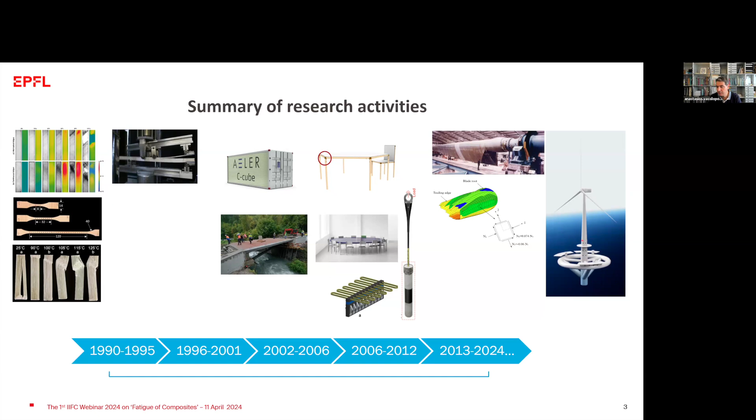This is experience gathered over the last 30 years, and actually this experience led me to start discussing and investing time on new concepts where I think we can use composites for novel or innovative structures, like this offshore platform shown in this figure.

The experience that I have is on composites, and it's not dedicated only to one application. It's not dedicated to aerospace. It's not dedicated to bridge engineering. It's a global overview that I gained on composites in different engineering applications.

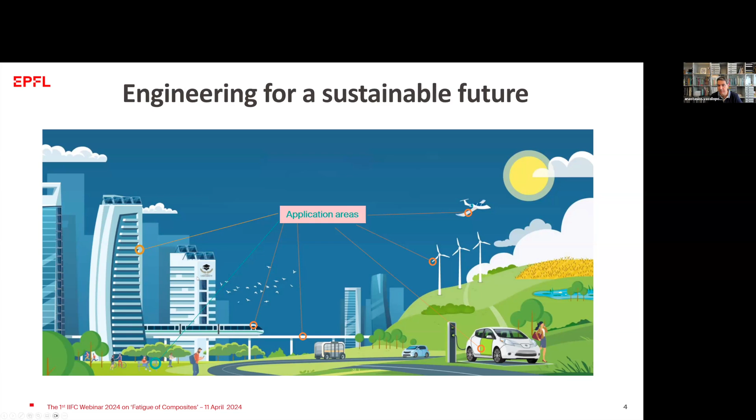Especially when we talk about composites, you all know better than me probably that we use composites because we claim they are more sustainable in engineering. Today we have a lot of proof for this claim, arguments to support it. So we see composites in literally any kind of engineering application today.

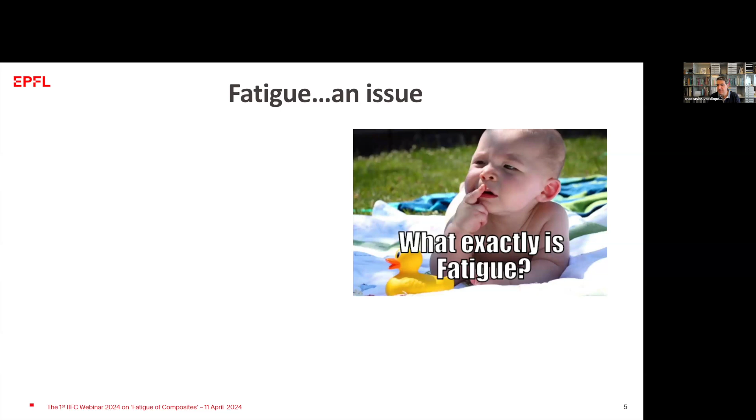I said I'm working for 30 years, and for me 30 years is an issue—it causes fatigue. I was thinking since I was very young, what exactly is fatigue? And after these 30 years, I realized that we have very little idea about fatigue.

And how it affects a lot of structures in our environment around us. So what we'll try to discuss today is fatigue—introduce fatigue and explain what fatigue is for those who probably don't have such a deep understanding about this.

We'll try to touch on the importance of fatigue for composites, and at the end of the day we'll summarize what we know today about composites fatigue. I hope that afterward we might have an idea about what fatigue is.

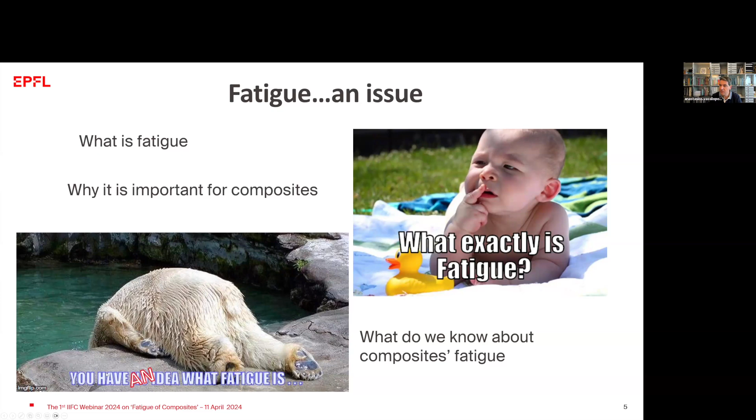If we go back to history, we can see that fatigue is something that has been bothering engineers for probably 200 years, with the first investigations starting in Germany about 200 years ago.

It was this engineer called Albert who realized that there were failures in conveyor chains, although they were not loaded at the highest loads they were designed for. They realized this was something different than static loading, than the loading that causes static failures, and they tried to find out what was causing this kind of unexpected failure.

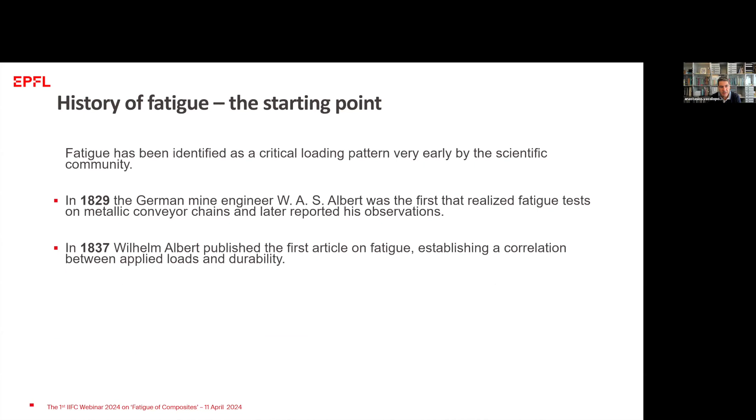Later on, he was the first to conduct tests and publish something related to fatigue, although he didn't call it fatigue. It was the French engineer Jean-Victor Poncelet who wrote the first document in 1841 where fatigue was mentioned as fatigue in something written. So the first time we see fatigue written in a text was in 1841.

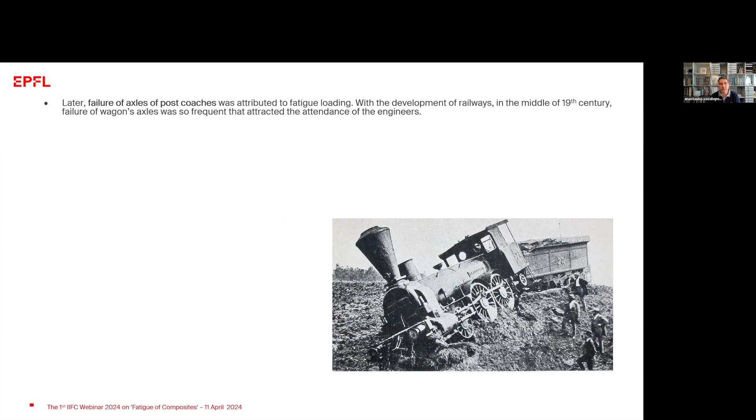Later on, we saw a lot of failures in axles of post coaches and trains, which led to a lot of investigations. What's surprising is that the same types of failures, like train derailments due to failing axles from fatigue, are still happening today. We have some reports.

This one I'm showing here is from Australia in 2017, and we see a typical fatigue crack on the axle of the train. Due to these failures, there were a lot of investigations documenting that most structural failures are due to fatigue or fatigue-related phenomena. Actually, more than 80 to 85% of failures in any structure are today acknowledged as fatigue-related.

So these investigations, or if you like, these observations of failures, led engineers to do more.

The first big program on fatigue of metallic materials was the one realized by August Wöhler. Probably you all know the Wöhler curves that we are still using today.

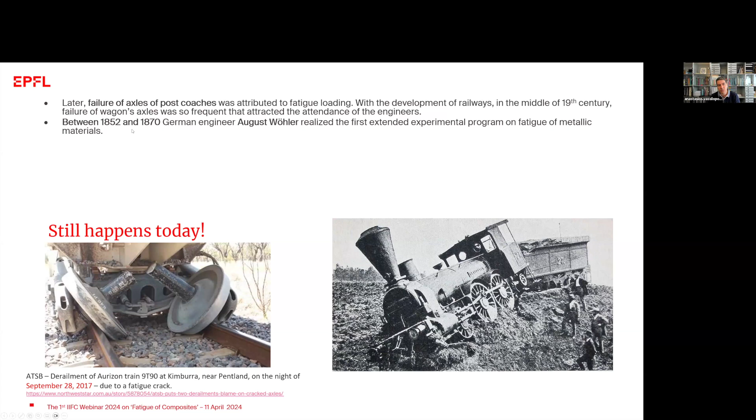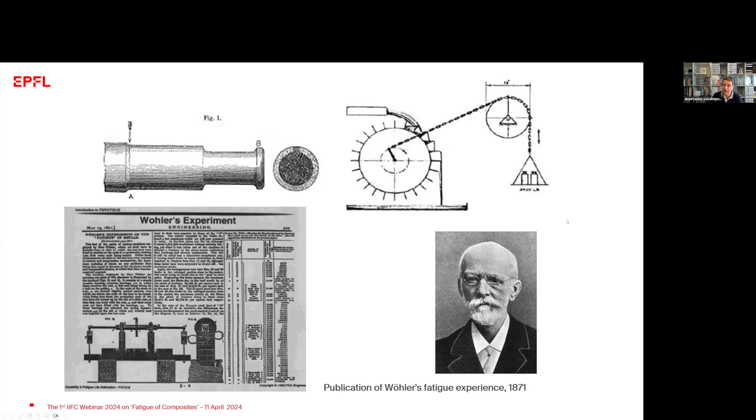What did he do? He tested railway axles for different loads. I have the paper of Wöhler, the publication. There was a continuous tension compression loading because it was a rotating machine applying different types of loads to the axles, and he reported the time to failure.

Imagine this is my graph. I'm doing a test where the maximum stress applied is 70 megapascal. I count the number of cycles to failure, which in this case might be 7,000 cycles. I put this point here, and this is the first point that I have. If I repeat the test at the same stress level, I get repetition of points that show the scatter of the fatigue data.

I can do it at a lower stress level, and lower, and so on. This is how we create the cloud of data that produces what we call today the SN curve, what was called before, and is still called in metallic materials, the Wöhler curve.

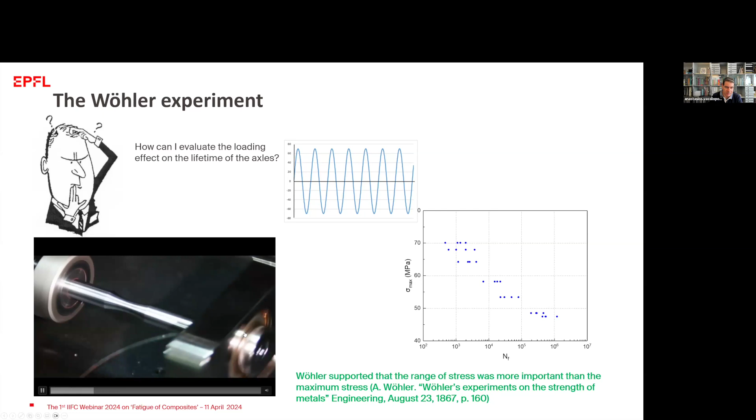So here I collected from the net an experiment, a small video showing the experimental procedure, similar to what Wöhler did. We have a rotating specimen here, a load that causes the stress, and then after some rotations, we see the failure of the specimen in the middle, which is attributed to fatigue.

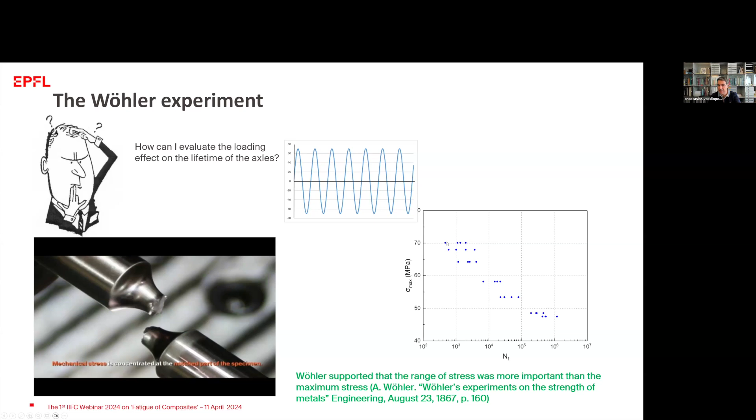So we described what happens here: we put the specimen under load, test it, and record the number of cycles to failure. This is the procedure I described before, and then we have the question: what happens in between?

Before, what Wöhler did was only putting the data on the SN diagram, as we call it here. Then another engineer, Basquin, introduced a line, claiming that a logarithmic relationship - a linear relationship between the logarithm of sigma and the logarithm of number of cycles - is appropriate to fit the experimental data well.

This first SN curve, if you like, was introduced in 1910, and guess what, it is still used today. This is the most common SN curve equation we use today, although others exist, because as we will see later, there are different ranges of lifetimes showing different failure modes or failure behavior of the material. Today we know the SN curve is a bit more complicated than this.

So then we had the effect of the mean stress. What we described up to this point, what Wöhler did, was a rotating axle with a load at the end, meaning tension and compression of the same amplitude, so the mean stress here is 0 in this testing.

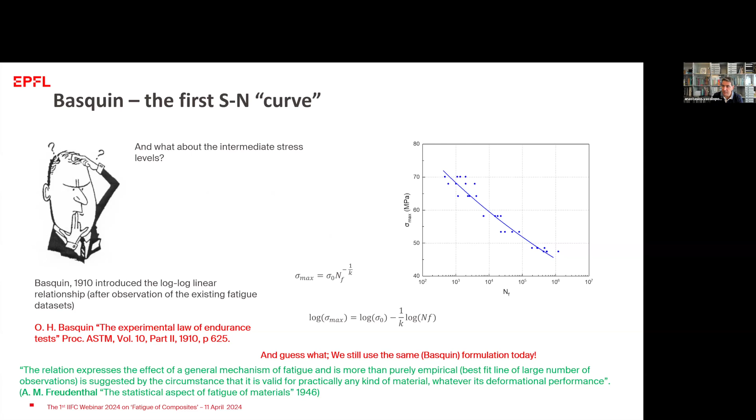If the mean stress is not 0, for example if we test only at positive stresses or only at negative stresses, then there is a mean stress effect. We've seen today that there is an effect, especially for composites, a significant effect of the mean stress. And good for us, there was a good man...

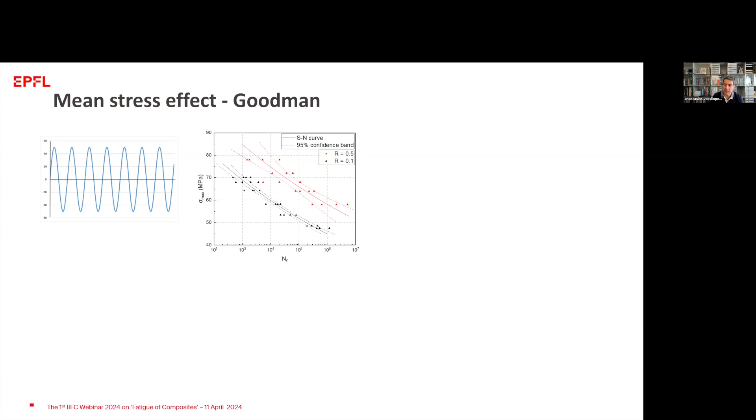His name was Goodman, who developed diagrams called the Goodman diagrams, which give equations that can more or less give a relation between the amplitude of the loading and the mean stress of the loading. In this sense, we can get some relation between these magnitudes, these stress components, and quantify somehow the mean stress effect on materials.

We'll see later how this is applied now to composites. I had it also before - all these engineers, I mean Goodman was a civil engineer, but was working on this investigation of the mean stress effect, and he was also modifying other types of investigations by others.

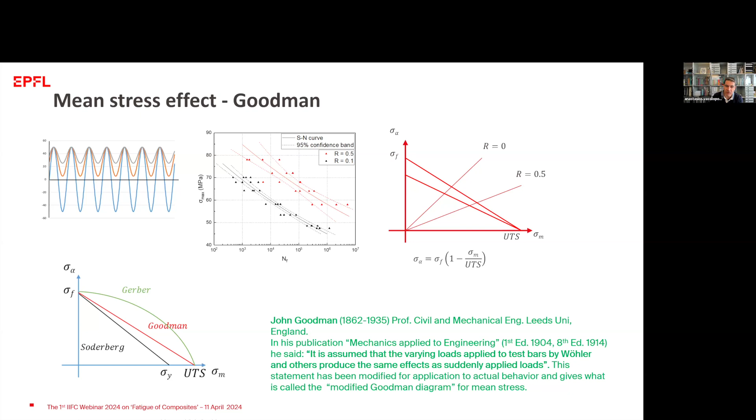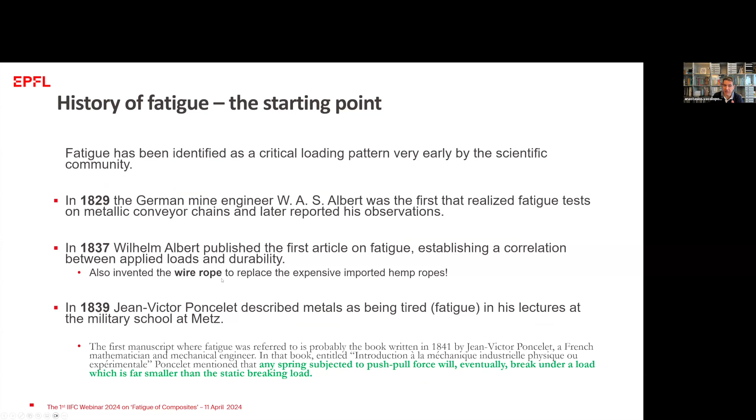Before, we've seen that, for example, here in this slide, Albert was an engineer working in the mines, but he also invented the wire rope, for example. You see that at this time, engineers were not focused as we are today on one specific application, but were engineers in a broader sense.

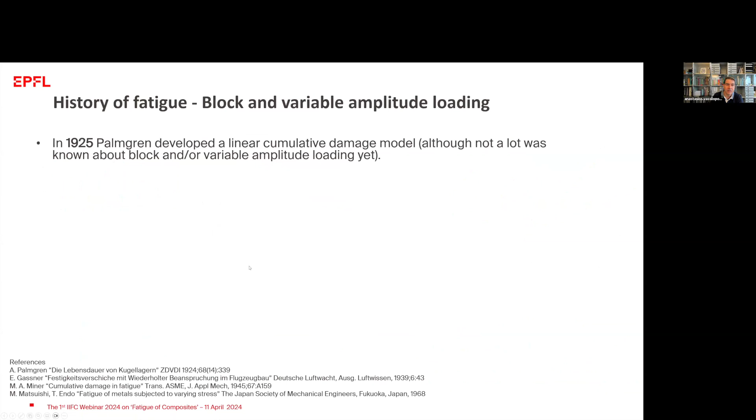We've seen that this continuous loading we already discussed is not close to reality. In real applications, we have loads of variable amplitude, and we managed to do realistic tests after the 1950s, where we had the first closed loop electrohydraulic testing systems that could follow a variable amplitude loading. It was during this period, more or less between 1925 and 1945, that Palmgren and Miner introduced the cumulative fatigue damage rule we still use today, although we know it's not very successful in predicting lifetime for composites.

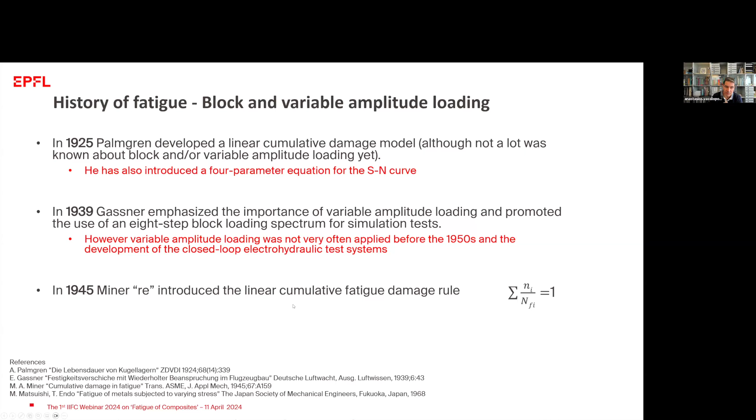What I was saying until now was based on phenomenological investigation. We do a test, measure the number of cycles to failure, and this is observation, it's phenomenological. In parallel, we had fracture mechanics investigations. We had Griffith initially, and then Irwin, who introduced the K intensity factors and fracture mechanics. One is the early father, the other is the father of fracture mechanics. I don't know who is the grandfather, but these persons put the basis for fracture mechanics theories we are still using today.

When we talk about fatigue, we talk about Schijve, if I pronounce it well, a Dutch professor, and Paris, who both worked on what we call today the crack growth, fatigue crack growth curve—a curve showing the relationship between the speed of the crack in fracture and the load we apply. The load can be given using K or using G; we use G in composites, the strain energy release rate. But there is always a component showing the load applied, and on the other axis, the speed of crack, dA over dN. So this is a typical Paris law equation.

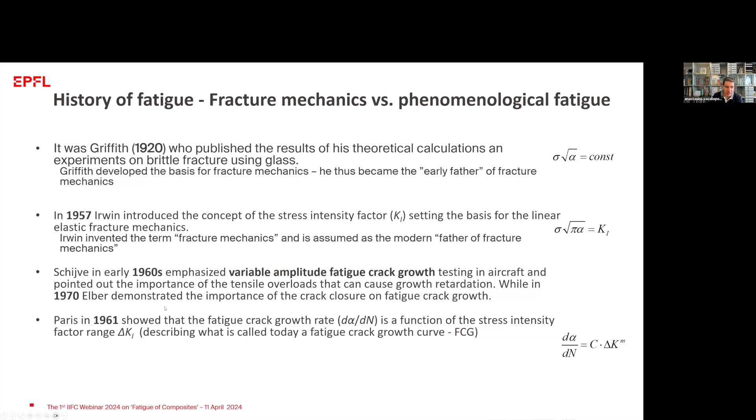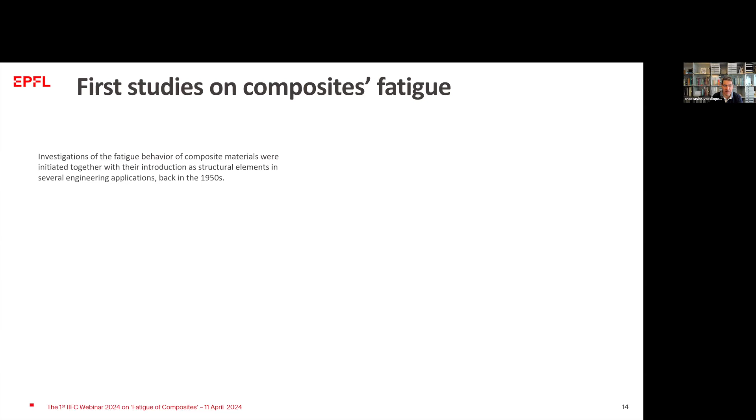Until now, we didn't say anything about composites, as all these investigations were linked to fatigue of metals, going back 200 years. When we talk about composites fatigue, we have to search back to the 1950s, with the introduction of composites in the engineering field. We've seen papers from 1948, 'Mechanical Properties of Five Laminated Plastics' by Findley and Worley, and another one from 1942. These are the first papers discussing properties of plastics, as composites were called at that time.

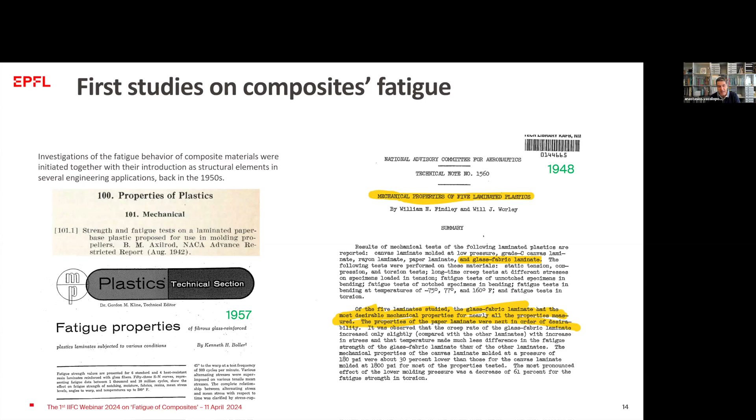Most of these papers do comparative studies. In this paper, 'Five Laminated Plastics,' if you go deeper, they tested five different types of resins with the same fibers to investigate their performance and find out which one is better. So it's mainly a comparison. The same was done by Hulbert in 1955.

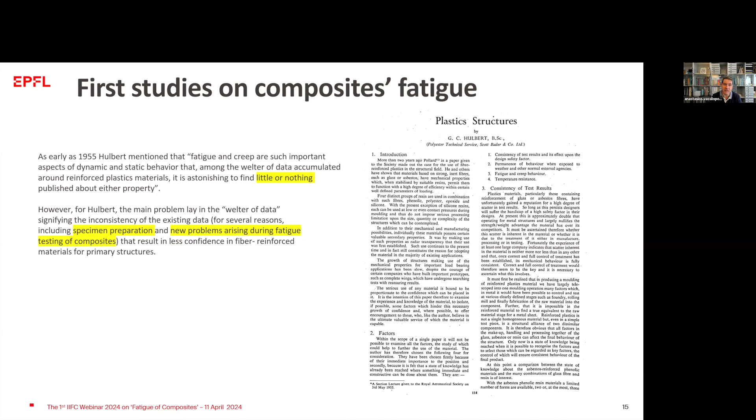Hulbert realized we have almost nothing published about creep and fatigue. Creep is introduced so early because, as we discussed before, regarding the mean stress effect, composite materials have at least viscoelastic behavior at certain temperature ranges, depending on the resins used. So we have materials that are viscoelastic, meaning that with non-zero mean stresses, we also have a component of creep in the fatigue behavior. This has been identified as a factor affecting fatigue life of composites, not metals, since 1955.

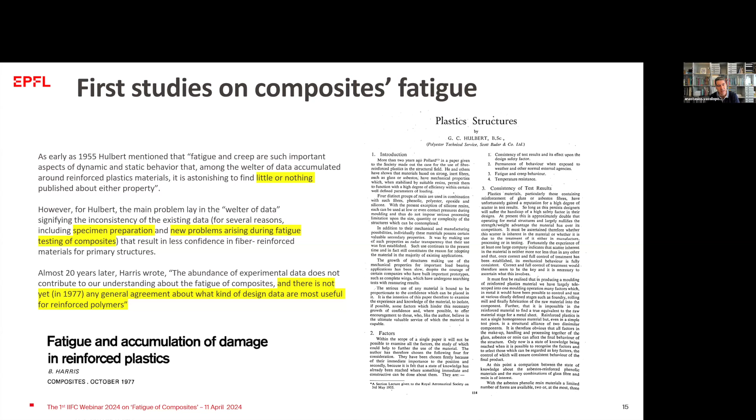For them, the problem was that we have only a few data points and inconsistency in the data. Going 20 years later, probably 45 to 50 years before today, Brian Harris, in his 1977 paper, said there is no general agreement about what kind of data we need to design structures with fatigue considerations. Coming to today, we still have this question. We don't know what kind of data we need. We don't have commonly accepted theories for designing composite structures for fatigue, and there is no commonly accepted protocol or standard for data collection and curation. We'll discuss this later as well.

Continuing this review of materials, we've seen that in the past, composite materials were considered fatigue insensitive.

And this characteristic of composites as fatigue insensitive was given when people started testing carbon fibers. Carbon fibers in the 0 direction show zero or very minimal stiffness drop during loading, and they saw no damage until close to failure. This was also introduced once in the 1980s as the sudden death phenomenon.

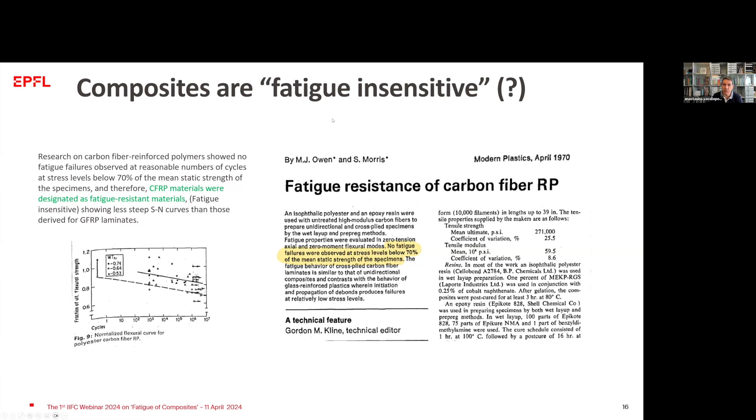It was the phenomenon where, while testing unidirectional composites along the fibers, no damage was identified, and then the material failed suddenly at a certain number of cycles, or at a certain point of stiffness degradation, without any announcement before. That's why it was called the sudden death phenomenon, and that's why composite materials were called fatigue insensitive. We'll see that this does not hold true anymore.

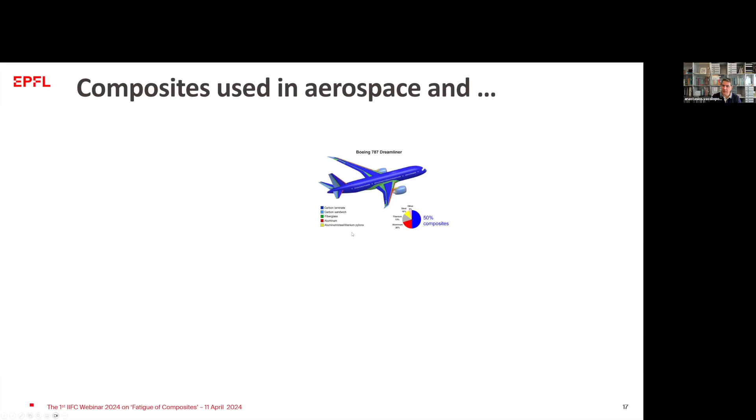So you probably all know this famous figure about the Boeing 787, which has more than 50% composites in the body. The same happens for Airbus, and we all know that composites are used in aerospace for a lot of reasons. Probably we don't have in mind the history of composites and the way they have been used since a long time ago, since the 1940s and 50s, in a lot of different applications.

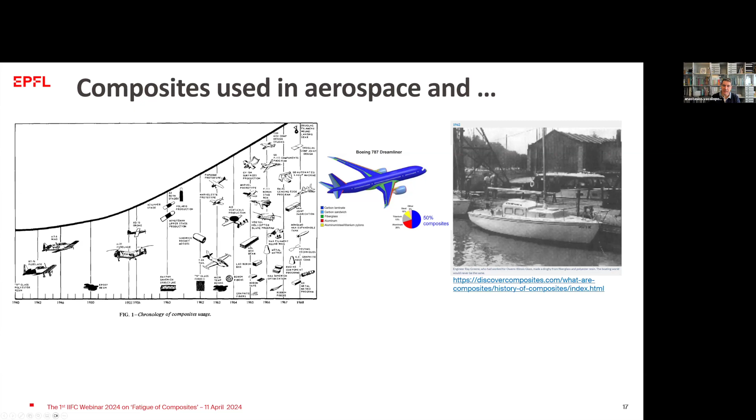The common characteristic of all these applications is that they all face intensive fatigue loads during their lifetime. And this is one of the reasons that makes fatigue for composites very significant. Another reason is the lightweight characteristic of composites.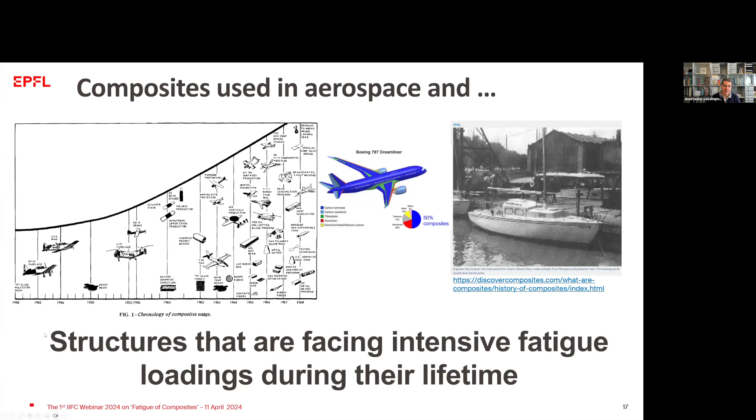If I bring a very simple example that might be self-evident for everyone: imagine a concrete bridge that is so heavy that the traffic load is minimal and does not affect the behavior of the bridge. If we talk about a similar composite bridge that might be 4 or 5 times lighter than a concrete bridge, then the live loads become significant. And the live loads are always fatigue loads for this application. So we know that fatigue affects the behavior of composite materials a lot in different applications.

And we now have a lot of structures like wind turbine blades that are supposed to live for 30 years more or less, and they face more than 100 million cycles during their lifetime. We have helicopter blades approaching 100 million cycles. We have bridges and ships which, depending on the design and dimensions, might see more than 10 million cycles. So we have a lot of composite structures facing a lot of fatigue loads during their lifetime. And these structures are massive, huge.

You know about the longest blade. Today, I think it's 120 meters. This was the longest blade a couple of years ago, 107 meters, made by LM for the offshore 12 megawatt machine that they were preparing at that time.

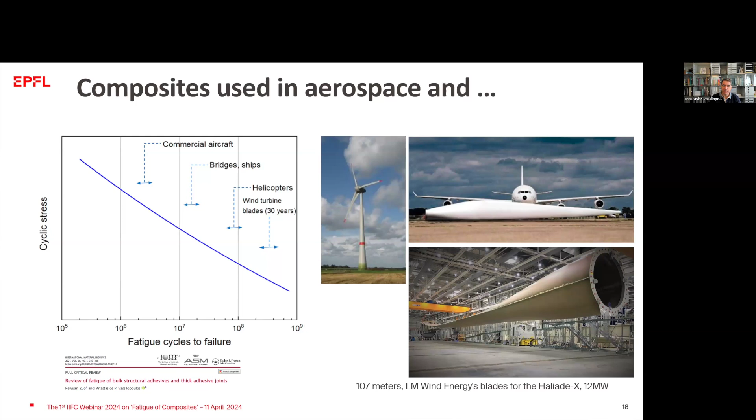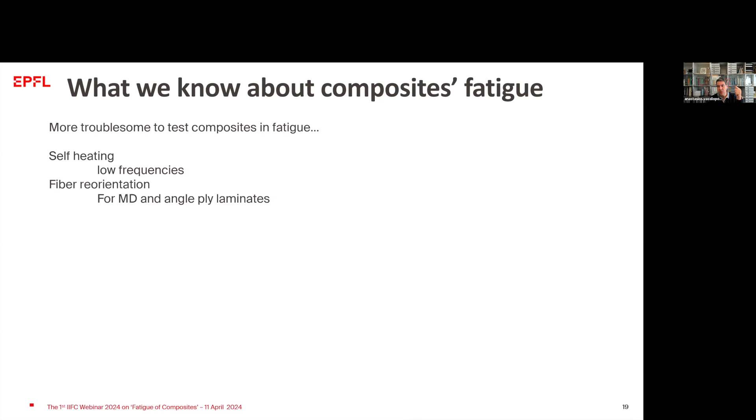So what do we know about composite fatigue? We know that it is more troublesome than fatigue for metals. When we test, we have heating of the material, so we need to test at low frequencies, which means we need to spend more time testing composites. We have problems when we test multi-directional laminates or angle ply laminates. We have reorientation of the fibers due to the loading, and this actually changes the material. So we are testing a material that is changing during loading, and we have to consider this as well.

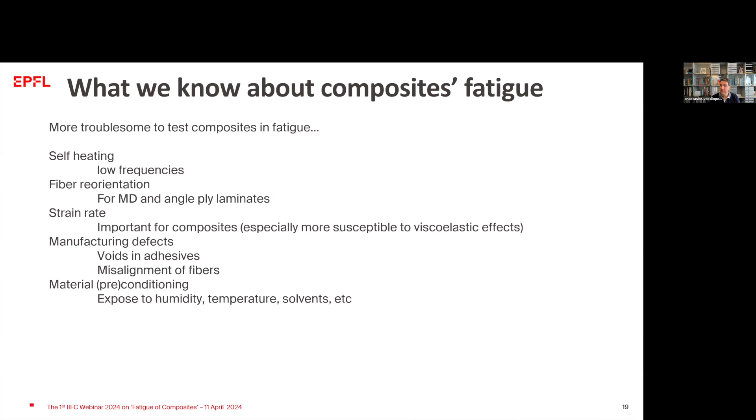We have an important effect of strain rate on material behavior, and it is more significant when we have viscoelastic components, such as thermoplastic composites, or epoxy composites where the matrix is quite ductile. We have problems with voids in adhesives, misalignment of fibers during manufacturing, or manufacturing defects that can affect the performance of the material a lot. We have material preconditioning problems because the material is very sensitive to temperature, solvents and humidity. So the material and the testing environment should be controlled to avoid all these effects. We have problems with specimen geometry and a lot of tab failures in composite or adhesive specimens.

And we have standards that fail to consider these effects. We follow the same standard, we use standard specimen geometries, and we get different results in some cases. So I'll come back to each one of these considerations of composites.

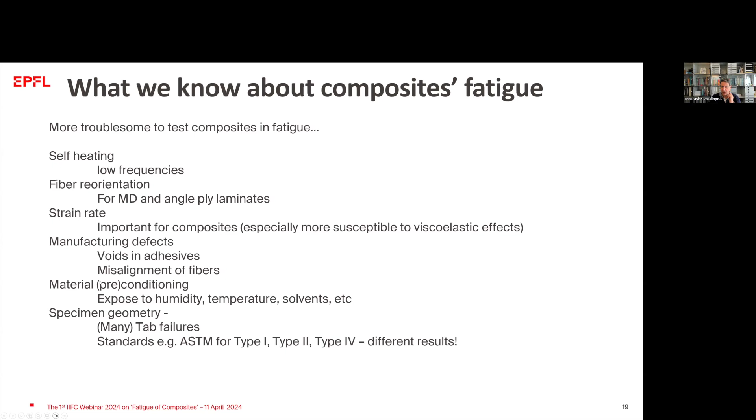I will continue discussing this knowledge that we have with composites, what we know. If you look back, although today we are still investigating these effects, we almost know everything since the 1970s.

There are publications from that time, this one from Salkind for example, 1973, discussing the damage modes or damage progression in composites compared to the damage progression in metals, which you see is much simpler. You have one crack that propagates, and at the end, when we reach a critical damage, we have fracture.

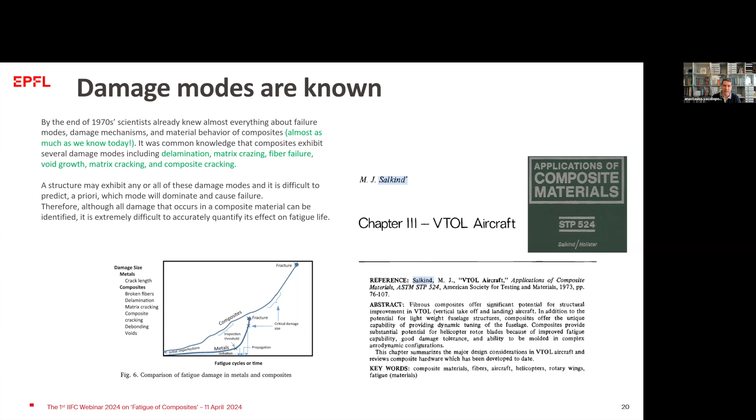While for composites, we have a lot of different failure modes that do not appear individually, but they are interacting, and this makes the behavior of a composite material much more complicated than the behavior of metallic components. So this investigation about failure modes started early.

In the early 1900s, we had the first use of optical microscopes to investigate fracture mechanics characteristics. In the 1950s, we had the scanning electron microscope, and today of course we use DIC, X-ray tomography, thermographic cameras to investigate all these effects in metals and, of course, in composites.

And we can go much deeper. For example, with the scanning electron microscope, what we see in this left figure is failure of fibers. When we go macroscopically with DIC, we can investigate and exactly locate the failure before it happens by checking online.

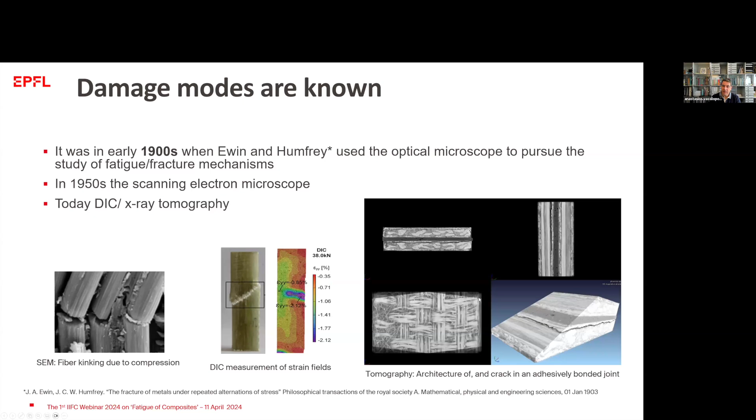I mean in situ, during the test, investigating and measuring the strain at different locations of the specimen. Or we can work with tomography to investigate materials and their damage modes in situ in some cases, but also ex situ after failure, to accurately investigate the damage location and the damage mode.

Continuing with what we know about composites, we know today that they are fatigue sensitive. Composites do fail in fatigue, and usually they do not show any fatigue threshold.

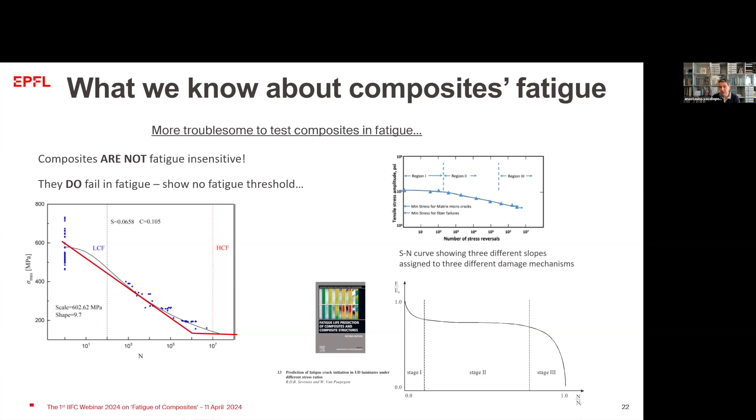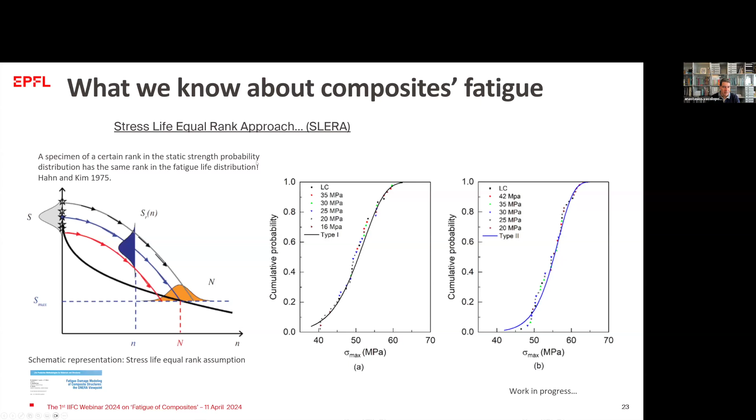Although this cannot be validated, because if you test a specimen in quasi-static loading and you break it, you cannot break it also in fatigue. It is something that we've seen with statistical analysis of failures of materials at different loading types.

We know also, as we discussed about frequencies, that there is a significant effect. When we do tests on composites, we try to keep the frequency low, lower than 10 Hertz for sure, sometimes as low as 1 Hertz, to avoid self-heating.

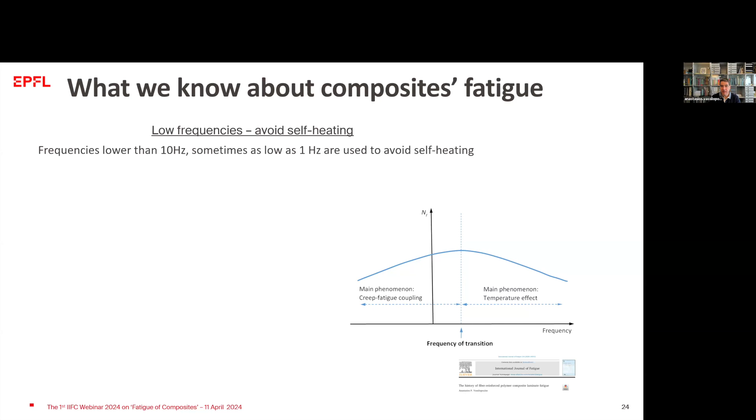This is because of the internal friction that comes when you have damage and cracks, and the material starts creating temperature, heat, because of the friction internally in the structure.

So what we know today is that there is an effect of this frequency on the material behavior. When we exceed a critical frequency, if you like to call it that, we have temperature increases and the life decreases because we soften the material actually.

When we go to low frequencies, and if we go to very low frequencies, then we have creep fatigue interaction, because testing at very low frequency means we keep the material at a certain load for a certain time, which introduces, in addition to the fatigue loading, creep effects as well. So actually the optimum is to find for each material, and this is not self-evident, but we have to do preliminary testing to find out which frequency is most appropriate for testing the specific material under investigation.

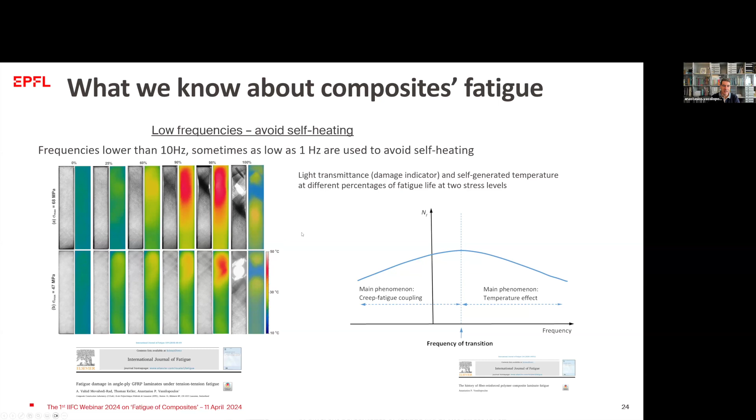We know also about these viscoelastic effects that we discussed before, the effect of creep, or the opposite of creep, relaxation of the material. As we said, composites are viscoelastic, and as we proved a couple of years ago with another investigation, we saw that if we stop the testing...

What we've seen is that the life of the material has been extended by a factor of more or less 2, which means there is a significant effect of this relaxation. The material relaxes when we stop the testing and recovers, and then we can start again at the same loading level and extend the lifetime.

What we've seen here, which is quite interesting, is that when we stop the test only at 2 hours and introduced a very short creep component, we've seen an increase of the lifetime, which means that this short stop actually helped the material recover instead of making the behavior worse.

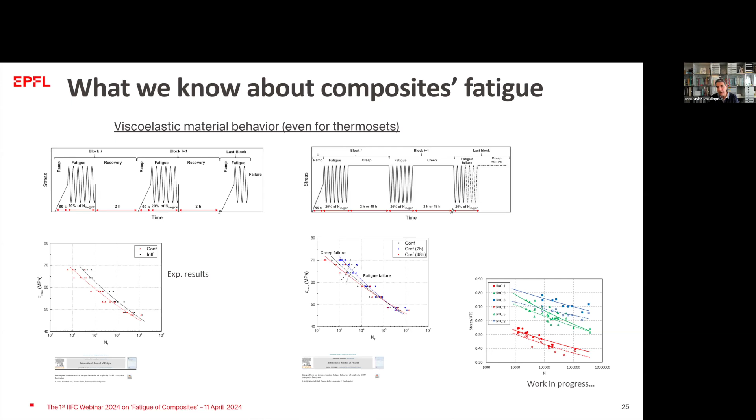And this is work in progress. I will not go into details, but we've seen significant effects of this viscoelastic behavior. And here we are analyzing the behavior of the material if we consider the true or the nominal strains that

we are measuring on the material during the testing by DIC. So we know also that Goodman, that we discussed before, is not anymore the Goodman. He's not good anymore, because the Goodman diagram that was suggesting a straight line between the known SN curves, actually the SN curve for R minus 1, R equal to 1, does not exist anymore, does not apply for composites.

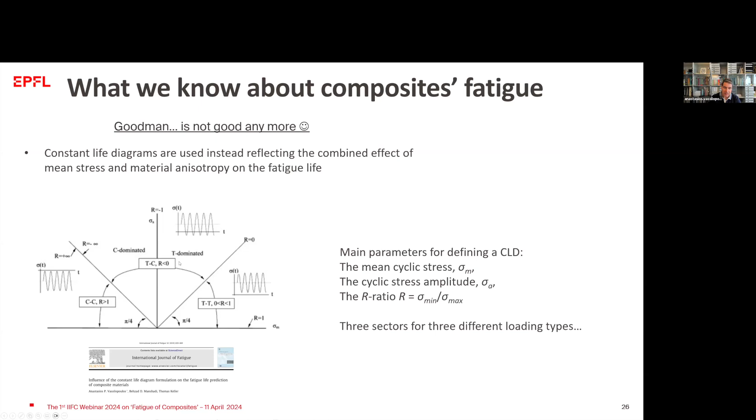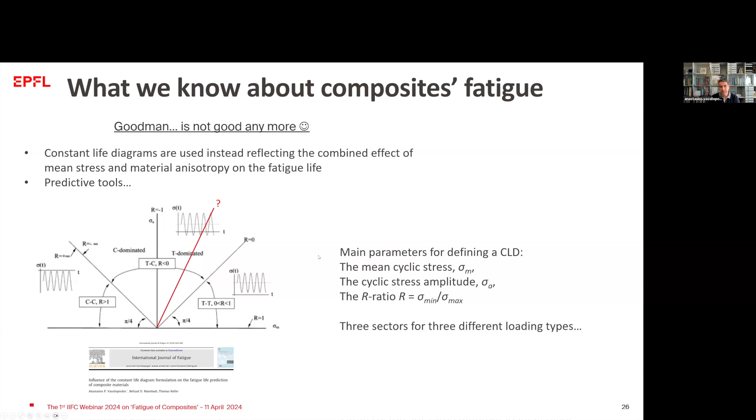The right sector that shows only tensile testing, the left sector that is compressive, and then intermediate here we have tension compression or compression tension on the other side. So we know now that if we use this kind of diagrams, we can use them as predictive tools, because theoretically we can predict an R ratio, so an SN curve actually, or an R ratio that is not known during the testing.

So for composites, as I said, Goodman diagram is not anymore a good one, a good selection. That's why here we use different types of diagrams. We published again this, depending on the material. There is different diagrams that are the best.

But what I wanted to point out here is that these diagrams show also the difference of the material behavior in tension and compression. So depending on the material, it might be that the material is more susceptible to failure in tension or in compression.

And what we can collect, this information by drawing these diagrams. We also have this behavior, this information where you remember before we talked about fatigue and creep interaction. So when we reach R ratios that are close to 1, we have more creep components. When we are at R ratio -1, theoretically, we have only fatigue because there the mean stress is 0, actually.

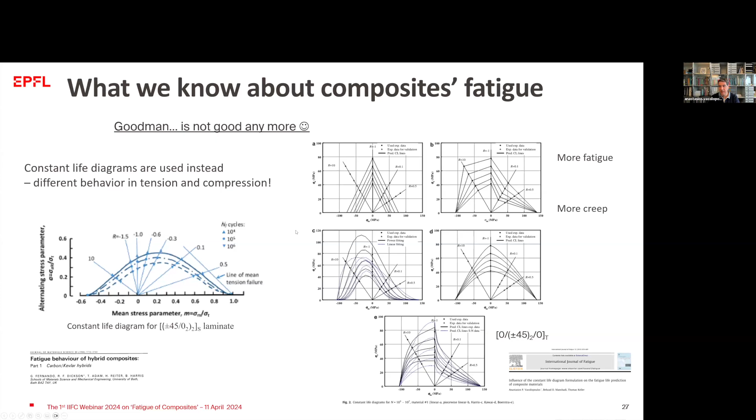So what we also know about composites is that we have to use multi-axial stress states. Even in uniaxial loading, when we have an off-axis material, we can simply calculate the multi-axial stress field in the material itself, which means that even for uniaxial loading, we have multi-axial stress states.

And actually, it was around 20 years ago that we introduced this concept, and we actually somehow imposed the change in the design codes for wind blades, for example. Until more or less 2000, the main stress component that was used for design was the sigma-1, so the normal stress, where we have shown that if you have a very minimum N2, so normal stress in the other direction, and N6 is the shear stress, that are very, very few compared to the sigma-1, the N1 in this case, these components can still give significant effects to the failure of the material.

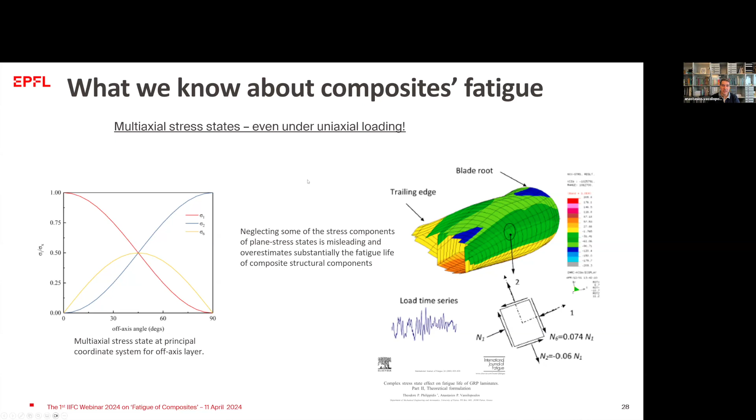So it was significant. It was necessary to consider all the stress components for designing composites in fatigue.

We discussed before about the specimen type, and we know today that there is an effect of the specimen type. There are standards saying that the specimen should be rectangular. There are investigations doing dog bone specimens - for example, in this paper from the group of Povl Brøndsted.

They found better behavior compared to the rectangular specimen in fatigue, and they scaled the results by considering the stress concentrations that they had. So the result from this paper is that if you consider the stress concentrations, you can alleviate the stress concentration in the rectangular specimen, and then you can probably have a rectangular specimen that gives good results.

We also did some tests following the ASTM standards for adhesives and polymers, using 3 different types of specimens. We realized that the result, especially in fatigue, is not the same, although the standard suggests that you can use either type 1, type 2, or type 4 specimen for doing the testing.

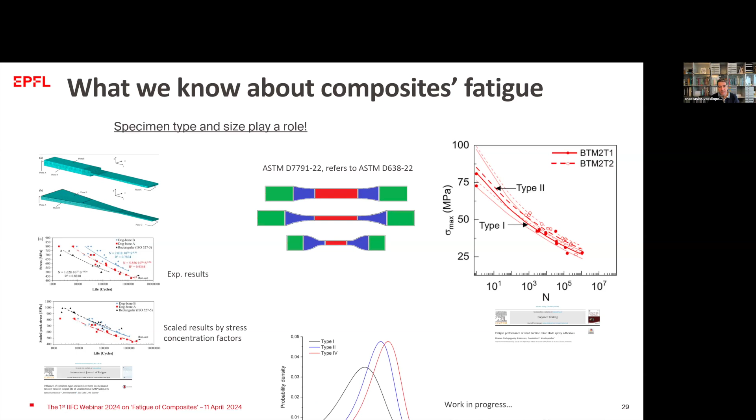We know also that when we use composites and polymers in different applications, now we have, as an example, this wind turbine rotor blade. And we know that this is completely different than what we've seen until today, different than the structures that we have with metallic materials. So the approach is different.

We have new materials used, new geometries used, new types of joints. So now we talk about thick adhesive joints. Imagine in aerospace, aluminum joints with film adhesives of 1 millimeter thickness. Now we talk about joints that have 10 millimeter of thickness or even 30 millimeter of thickness. We have reports discussing 30 millimeter thickness in wind turbines.

And of course, we know that these joints are made with, allow me to say, primitive techniques - nothing to do with the joints in aerospace that follow specific protocols. There we have a lot of voids, a lot of manufacturing defects in the joints, and the idea is to secure or guarantee the lifetime of a huge structure like a composite rotor blade, having in the body joints like that.

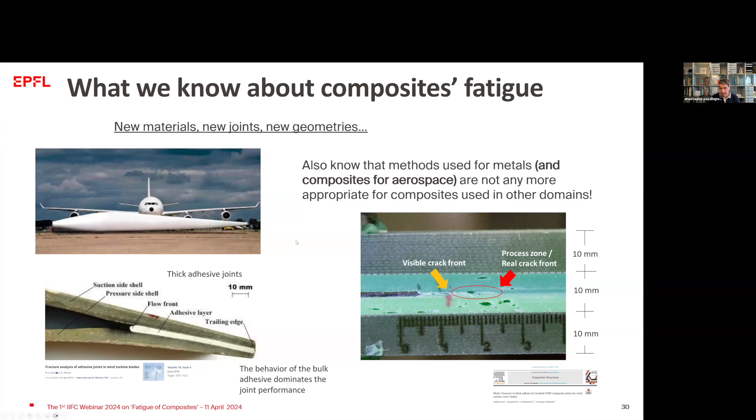So additional information is needed. We don't know. Here is what we know: we know that we have new materials and new geometries, but we don't know yet how these materials and geometries are performing. We've done some testing. We are working on that.

And we've seen the voids - this is a micrograph. These are percentages of voids in the materials, different percentages of voids - a lot of voids, less voids, or few voids. Although this seems like a lot, it's less than 0.5% of voids in the bulk of the material.

And we see that the presence of voids can significantly change the crack path in the material. In this case, where we have a lot of voids, the crack path is changing a lot, shifting from the mid-plane. In other cases, the crack can initiate from voids, or the crack can more or less be in the mid-plane when the voids are fewer.

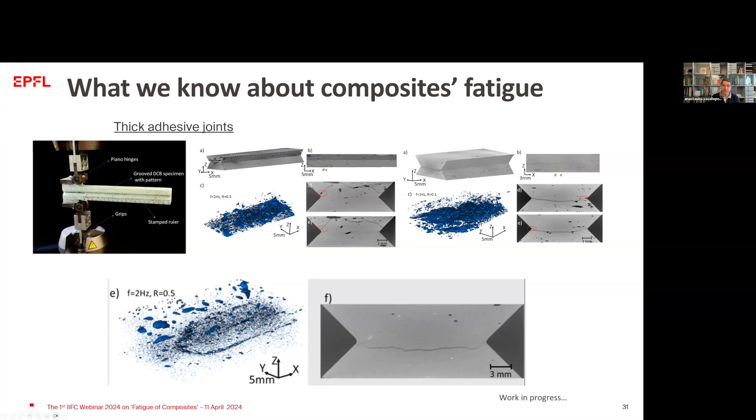So I discussed before also about fracture mechanics. Of course, in composites we have a lot of fracture mechanics used. There is a big discussion about using G, the strain energy release rate, instead of K, the stress intensity factor, especially because for composites it's very difficult, if not impossible, to calculate successful K values when we have cracks with large process zones and so on.

But anyway, we did tests. We are doing a lot of tests - mode 1, mode 2, mixed mode testing for composite laminates, for composite joints, as in this case that I'm showing. This is again from work that we did here at CC Lab 10 years ago.

And we produce R curves for static loading. We produce FCG curves, and also we develop models to fit this behavior. Here again, there is a discussion about what kind of parameter it should be.

It can be G, it can be delta G, it can be square root of G, or another parameter that defines the load that we introduce, the load that we apply to the material. And on the other side, we have the rate - the speed of the crack propagation.

You see that in a lot of cases in these graphs, we have a kind of fatigue threshold - a kind of bending in the curve when we approach values of cycles 10-6, 10-7, meaning that the crack propagates 1 millimeter every 10 million cycles. In this case, 10-7, which for a normal application can be assumed as a fatigue threshold, meaning the crack does not propagate anymore.

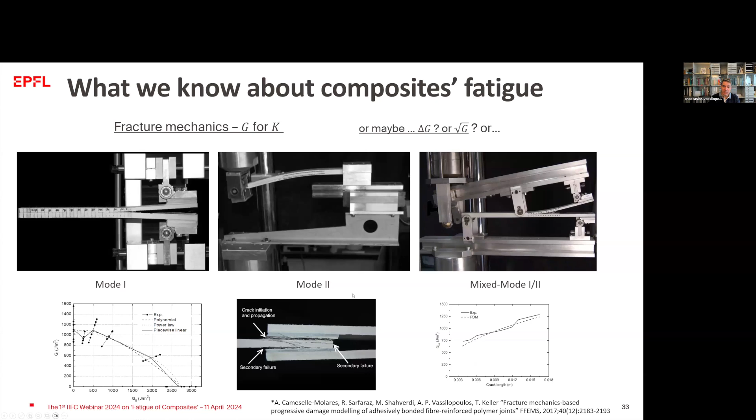So what is expected? And I'm close to summarizing. What do we expect with these fatigue investigations? It is expected to actually take out this red line. There is a red line between the observation, the models that we have for our structures, the models regarding the material used in structures, and the material data that we collect.

And here, if I remove this line, I have the calculation of stresses in the structure. I have theories like this, what we call CCfatigue, a theory that we are developing internally here in the group, that can give us a safety factor, if you like, for these dots here.

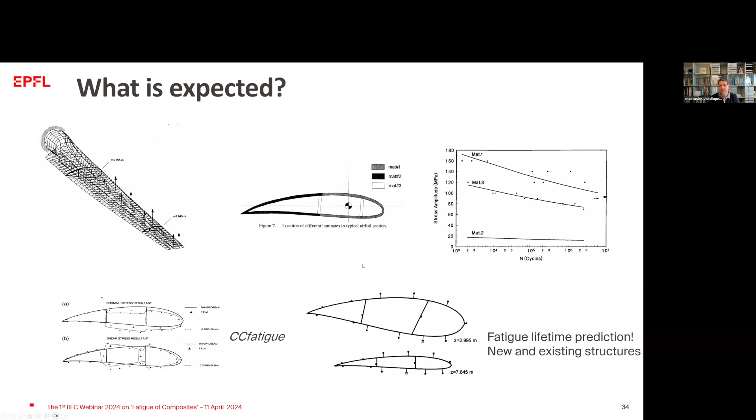So actually, what is missing is the link between the information that we have at the material level and the fatigue life prediction of new or existing structures. This fatigue life prediction of existing structures might be equally or if not more significant than that of new structures, because it is related to the extension of the lifetime of structures, which, if we go deeper, is related to the sustainability of engineering applications that everyone is discussing these days.

So to conclude, I will go very fast. We know that fatigue is very bothersome. It's a big problem in designing engineering structures. We know that most structures are failing due to fatigue or fatigue-related phenomena, as we said before.

Unfortunately, for composites, this investigation is more complicated because we have synergetic effects that are acting all together, and one is affecting the other. We cannot isolate effects as in metals, where we have a crack that propagates and leads the material to failure. There are a lot of different approaches to discuss fatigue.

And we know that, unfortunately, there is a lack of experimental data to validate these approaches. We've seen a lot of publications: there is a method, a theory, and a validation using a short term or small data set. And then this theory cannot be used for another material, or cannot be used if one parameter changes.

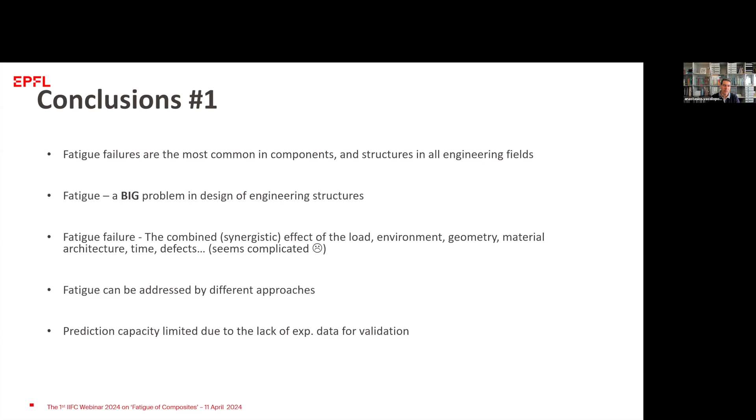So this is probably what is missing from what we are searching for. Today we are standing on theoretical approaches that exist, but we don't have one that is commonly accepted by everyone.

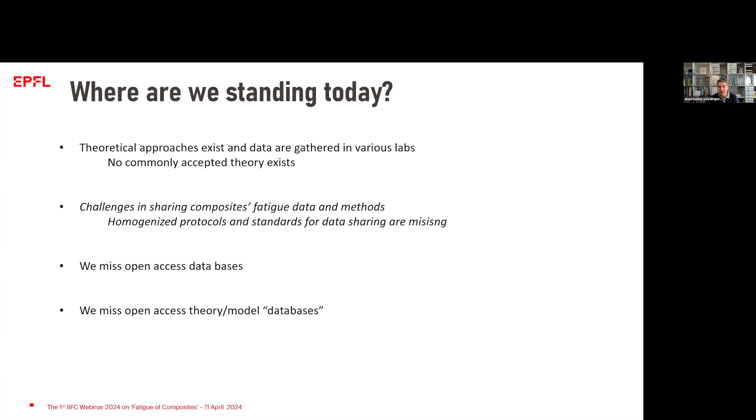We have a lot of challenges, as we said before, about sharing composite fatigue data. We don't have homogenized protocols. We don't have standards for this. We have even standards that are not, as I said before, reflecting exactly the behavior of the material itself. And of course, we miss databases, for both experimental data and theoretical models, and we miss the sharing

More or less, what we can do, what we can say, is that we already identified the challenges about composite fatigue, and now probably we know, at least some of us, that we have to work together for addressing these challenges and progressing in this field.